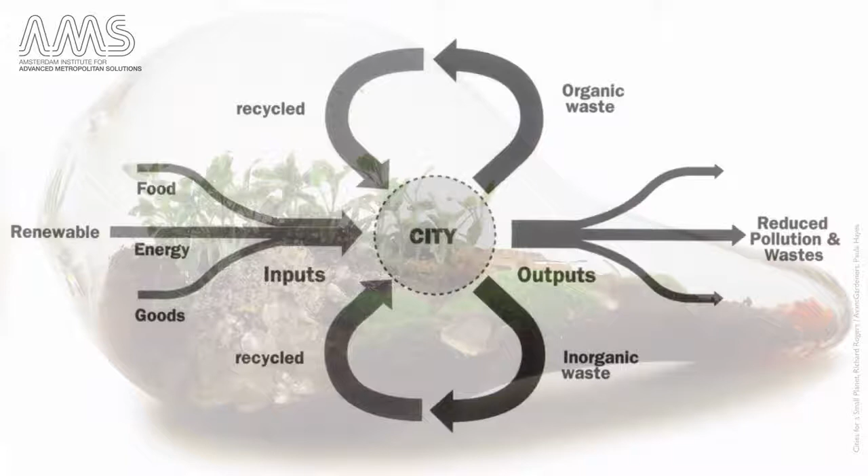A change towards circular systems which aim to minimize new inputs and maximize recycling, and thus to reduce pollution and wastes. To achieve a shift towards more sustainable systems, urban professionals, designers and decision makers often aim immediately to implement new systems based on renewables.

Besides the negative aspects of a too much techno-fix approach with all kinds of drawbacks, starting with new technologies overlooks essential primary steps to take before that, to achieve sustainable development of essential streams and related infrastructures.

As there is a preferred order in approach, the right order, known as the trias ecologica or trias energetica, is to first of all start with the reduction of demand. For instance, the demand for mobility, energy or water.

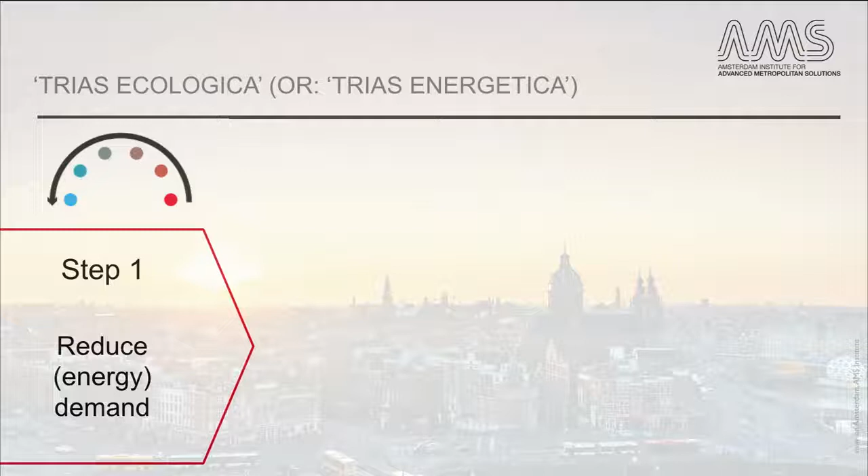In case of energy, for instance, reductions from 30 up to 50% of the amount originally used can be achieved already. But also in case of mobility, significant reduction of demand and thus reduction of necessary investments in new capacity or systems can be achieved.

The second step is to try to recycle available surplus. This can be, for instance, the availability of waste heat in an area by matching cooling demand of a supermarket with reusing the produced heat in that supermarket for the heating demand of apartments built on top of it. But it can also be related to the reuse of nutrients in wastewater or of clean water for agriculture.

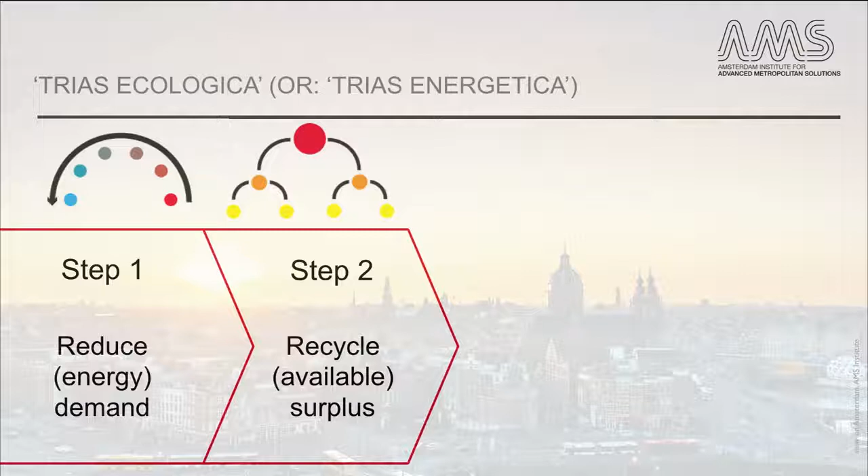Next, the third step in the trias ecologica concerns the introduction of generation of the essentials based on renewables. For instance, in case of energy, the use of solar panels, heat pumps or windmills.

However, in our existing organization of cities, still a fourth, final step needs to be taken, which is the use of existing resources. If this is the case, the aim should be to use these resources as efficiently as possible, here shown as the fourth step.

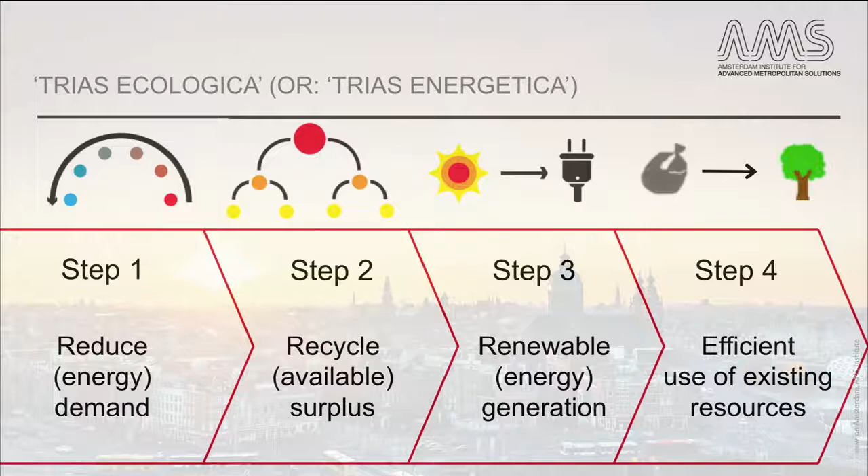Of course, the approach is called trias energetica or trias ecologica, as the aim should be to avoid such a fourth step at all. This 3 or 4 step approach also needs to be seen in relation to scale.

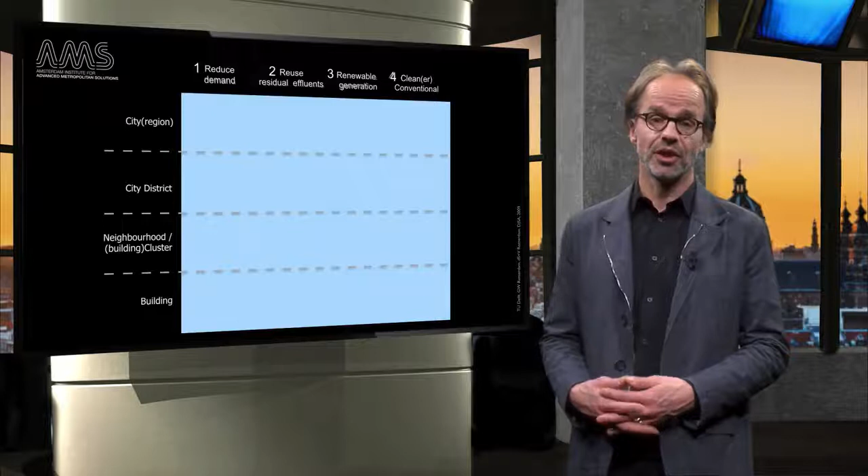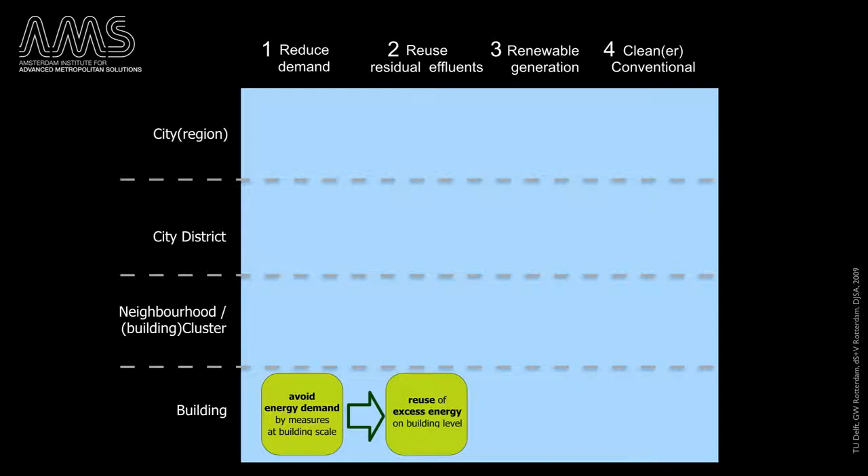As reduction of demand, the first step always considers the lowest scale of implementation, the user or the individual building. The second step in this approach, the reuse of existing surplus or so-called residual effluents, should be started at this lowest scale level too. But after that, this should be considered for the subsequent larger scales.

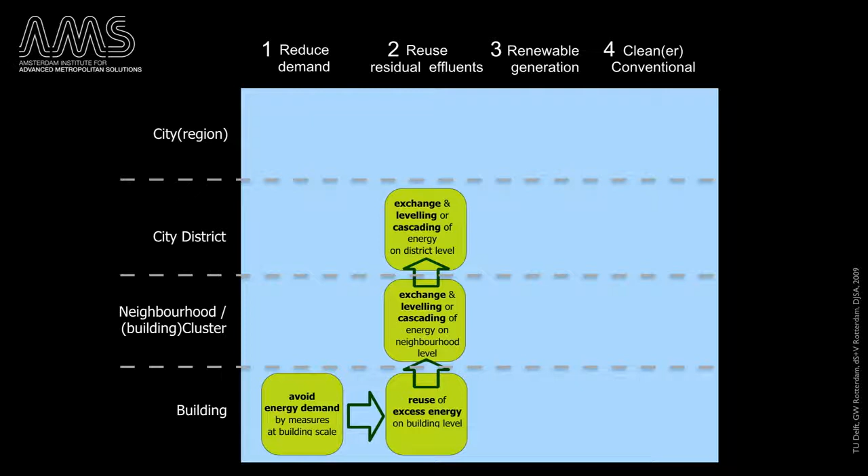Like for instance that of the neighborhood, the city district and the city region or metropolitan area. The third step, renewable generation, then can be considered at either of the scales where spatial, technical, social and economical aspects will define the optimal scale of implementation.

Again, like stated before, realizing more efficient use of the existing, be it either on a centralized scale level, at the metropolitan scale, or at the scale of the individual buildings, such a fourth step should preferably be avoided.

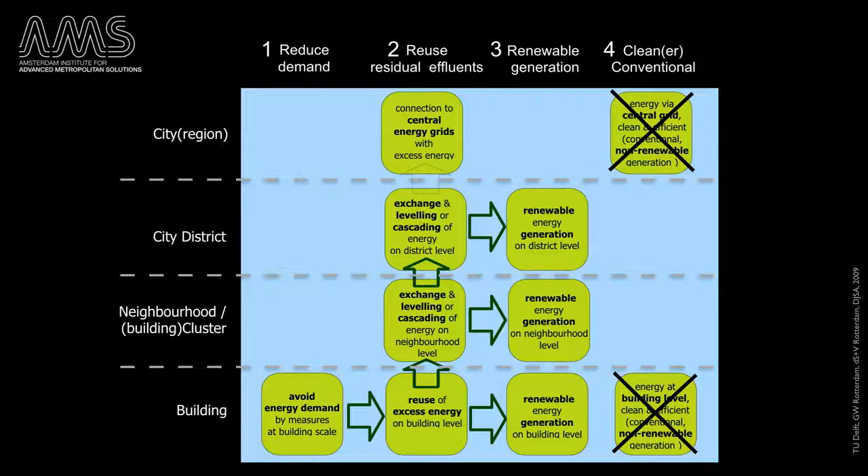With respect to the implementation and the architectural or urban integration of the different systems, it is important to be aware that nowadays, almost at all scale levels, we can find feasible solutions.

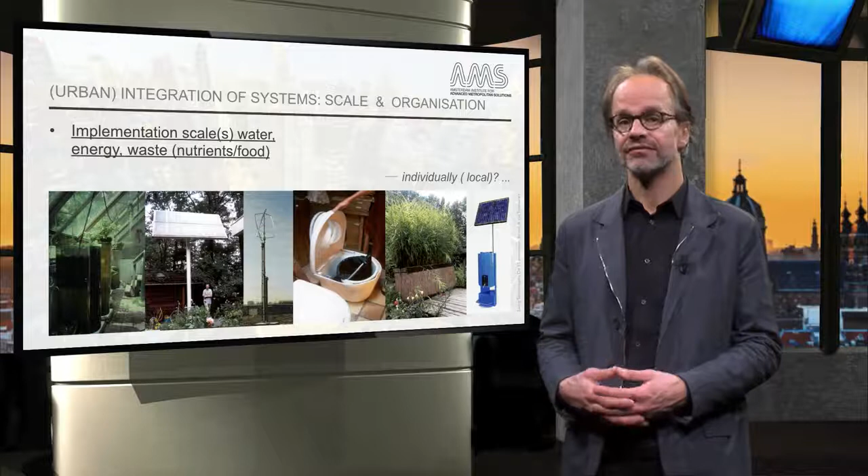For instance, on an individual scale level, or that of a household, we can purify wastewater to clean water based on natural systems, like shown here to the left in a so-called living machine. This living machine is placed in a conservatory.

But we can also generate energy via an individual pole with integrated solar panels, or a decentralized vertical axis windmill, like shown here second and third from the left.

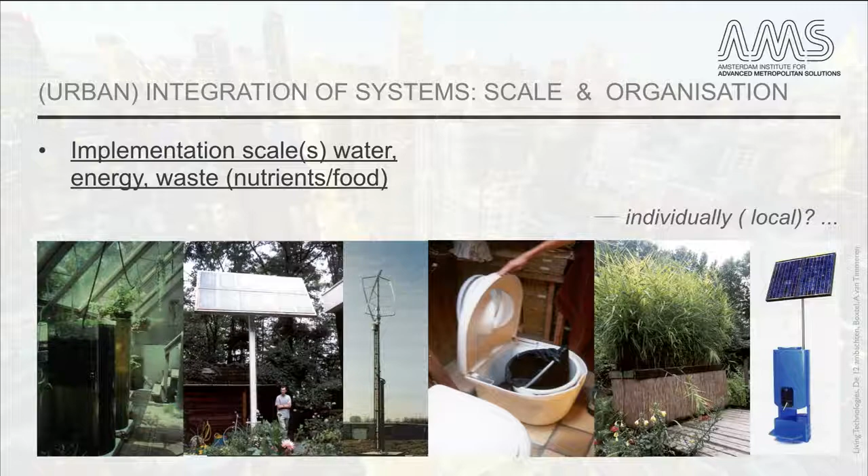But also more compact autonomous systems, either natural or entirely technical systems to compost excreta, purify grey wastewater or rainwater into secondary use water or even into drinking water can be achieved.

Important to notice here, however, is that to achieve certain optimization in efficiencies related to the environmental or technical processes, and thus also regarding costs and maintenance and implementation and space use, the individual scale level in general is not considered to be the optimal scale level.

In particular, not in case of urban environments and higher densities, or in case of clear urban living. In particular, social aspects will support real, sustainable or durable functioning of such systems. Therefore, a community-based, clustered or so-called decentralized scale of implementation is lately more often considered.

Shown here is again the concept of a living machine, but in this case at the scale of a community in Findhorn, Scotland. Also the Danish village of Marstal, where over 70% of its heat demand for the entire village is covered with solar energy generated with the solar collector plant shown here at the bottom of the image.

And to the right, a biogas plant in Latvia, which produces energy, clean water and soil out of wastewater.

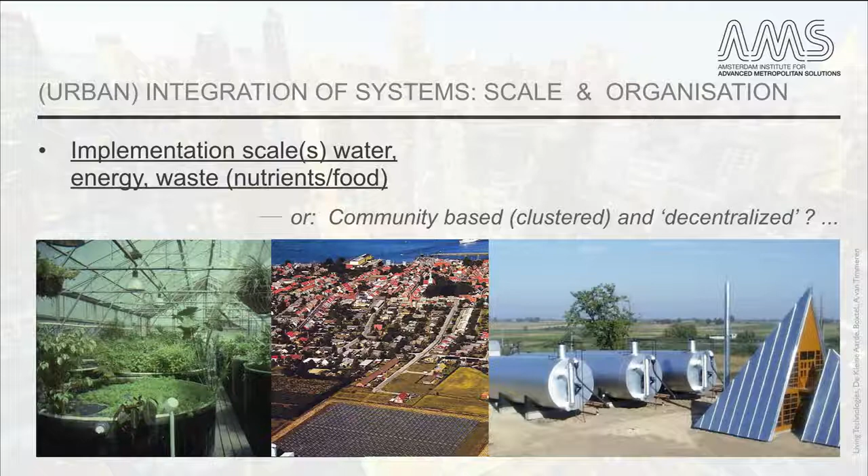The existing so-called paradigm or ruling way of doing in general, however, still concerns a centralized organization. Although this is from a sustainability perspective more and more frequently questioned as optimum. But from a security, management and related cost perspective, this is still considered one of the best scale levels of implementation.

From a social perspective, however, this is not necessarily the case, as the distance between user and solution is large, and thus it anonymizes use, and therefore also doesn't avoid wrong use or any learning regarding it.

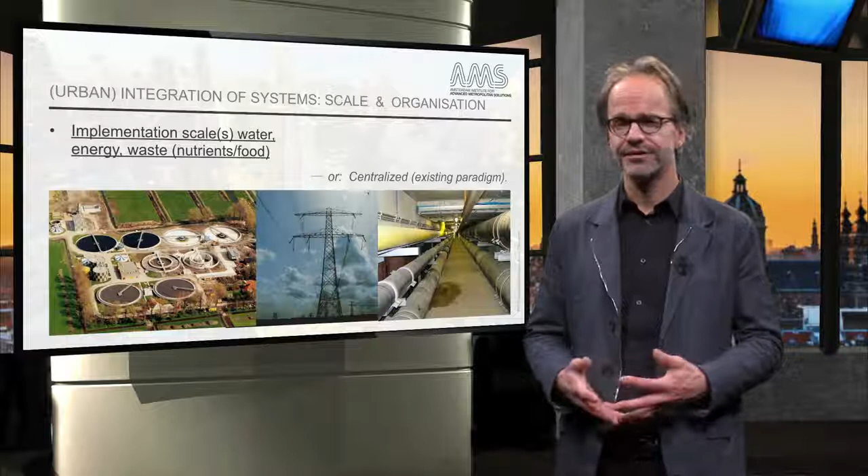Therefore, as stated, today's search for alternatives more frequently tries to find solutions at the previously shown intermediate scale level of a neighborhood or a city district.

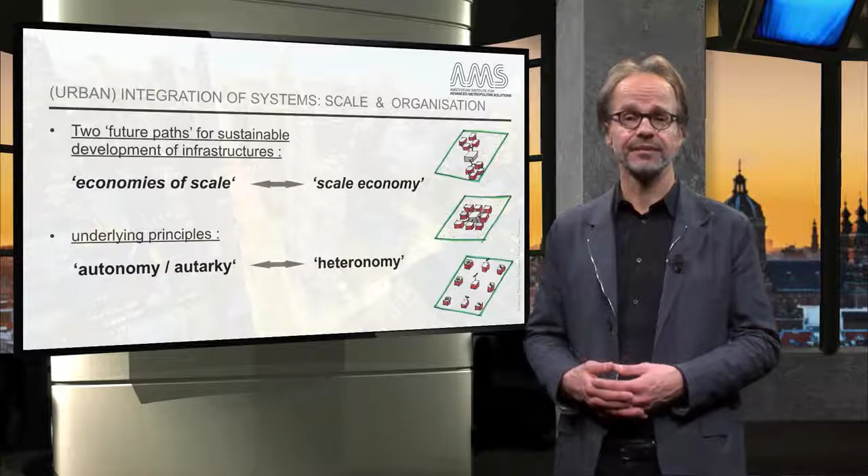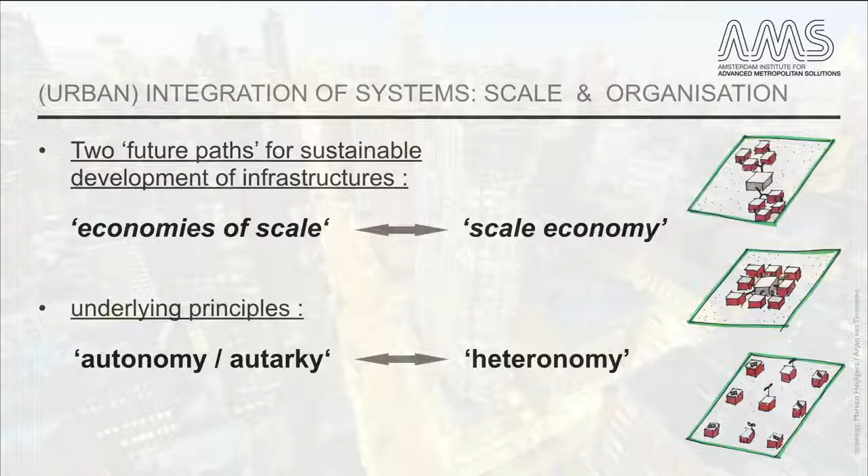To be able to include the positive aspects from technical and cost perspective related to the scale economy and so-called heteronomy or interconnection at larger scales, but also to the social aspects which request finding community-based solutions, either autonomous, clustered, or within a decentralized system consisting of several smaller systems, as shown to the right.

In the end, the optimal organization of infrastructures and services always will be place-specific. Nevertheless, lately a shift towards hybrid solutions and solutions at smaller scale levels can be noticed.

This is also the result of new ICT systems, which make it easier to respond real-time to variations in demand and supply, and to provide feedback loops.

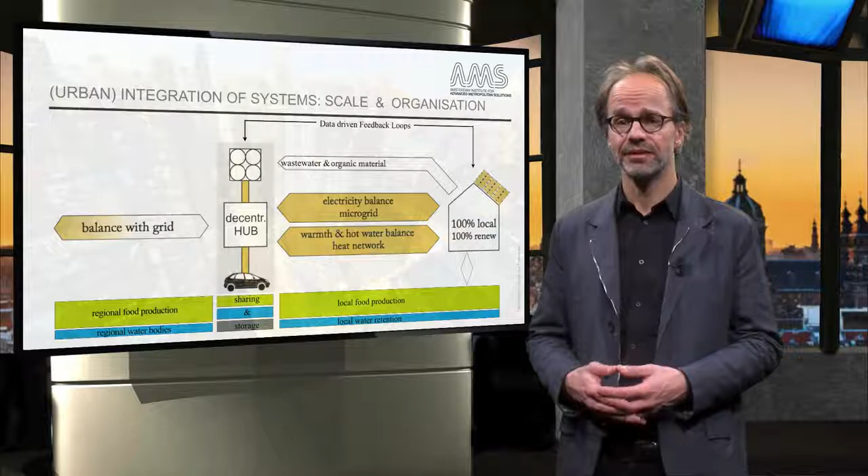The optimal scale for such an organization looks like the one shown here, in which an intermediate scale is introduced, between that of the individual buildings and centralized systems.

In this intermediate, decentralized hub, supply and demand of the different essential streams and related infrastructures can be matched, while it is also including storage to overcome misfits between peaks in demand and supply.